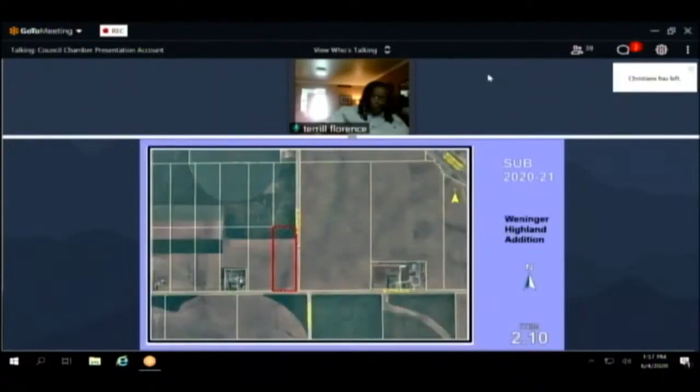Item K of the staff report discussed rights-of-way. The current right-of-way at the corner is supposed to be a 75-foot major intersection. As you can see here, the applicant has only denoted a 30-foot right-of-way dedication, so County Public Works would like to see that increase to the standard of 75 feet. Then it tapers down to 60 feet on the remaining portions of those arterials.

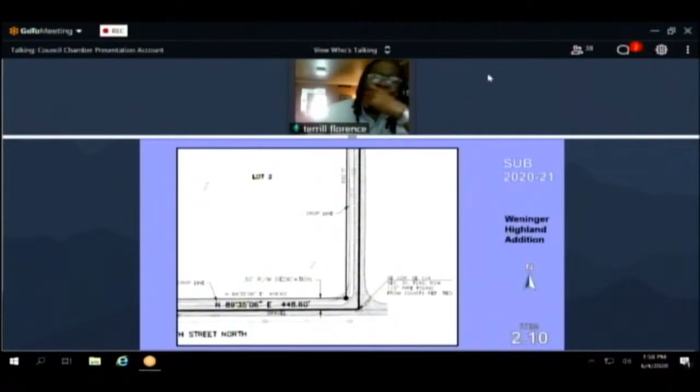Per item L, the Central County Fire Department is requiring their standard compliance with the service drive code. And that concludes staff comments.

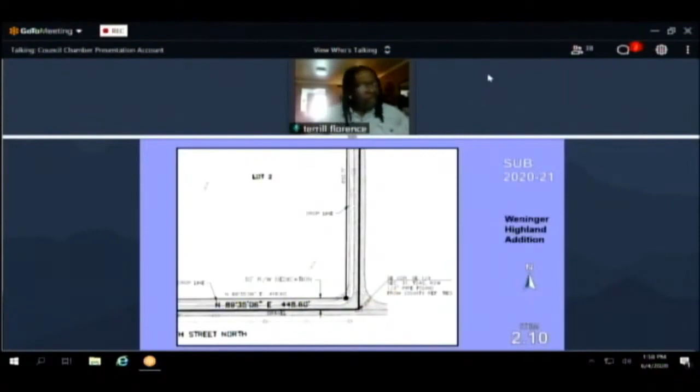Questions for staff? Questions for staff? Okay, no questions from commission here. Anybody at Century 2 wish to speak? Yeah, that's who wanted to hear it.

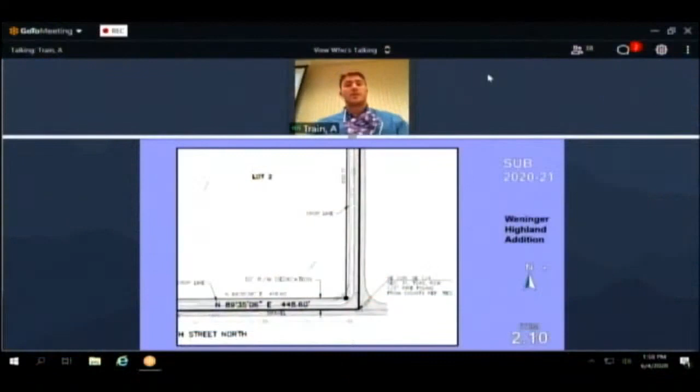Yes, we have the agent here for this item. Levi Bond with Kaw Valley Engineering, 200 North Emporia, Suite 100, agent for the applicant on this case.

We're in agreement with all the staff comments except for K, requesting the additional right-of-way dedication. We ask that the commission approve a dedication of 30 feet, as we have denoted on this plat, as 30 feet of half-street right-of-way. We're specifically making this request because the 30 feet matches the existing section line road.

We lost sound. Okay, try again. You got me now? Yeah, yep, we have you now. All right, sorry about that.

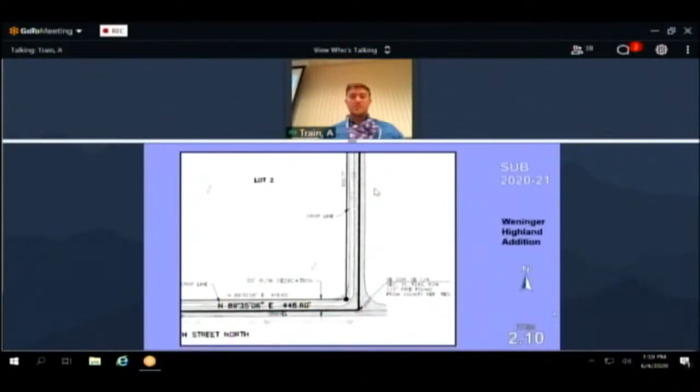So we're specifically making this request for the 30 feet of half-street right-of-way because it matches the current road easement, the section line road easement, as it has been since the estate was established. It'll allow for the continued use and maintenance of this road as it is now.

There's no clear and present need for an additional dedication. There are no plans to expand this road at this time or in the near future, as all of you probably know by just looking at the aerial. It's miles away from any semblance of a town. It's 3 miles from Andale, 3 miles from Colwich, 5 miles from Maize, I think, the closest point of Maize. So it's not near any municipality.

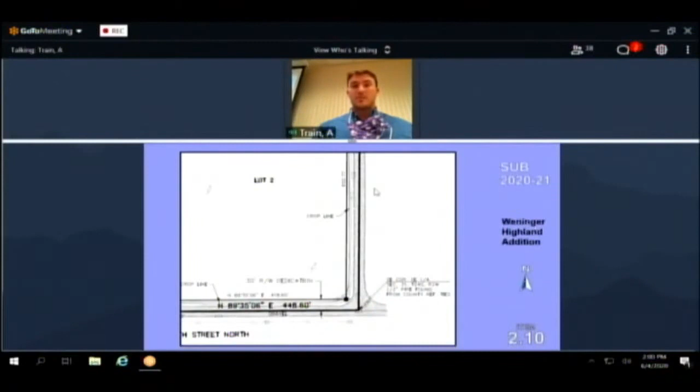If you did require the additional right-of-way, it'd be over 1 acre of additional land that we dedicate, which would have real financial implications for our client, thousands of dollars, in fact. They're negatively impacted by this financially, but there's no benefit received from this dedication, as there are no plans, and the road is already maintained by the township.

Given all that information and the lack of need and the lack of compensation for the dedication, we request that you approve a 30-foot dedication along both 199th and 77th Street. I'd stand for any questions.

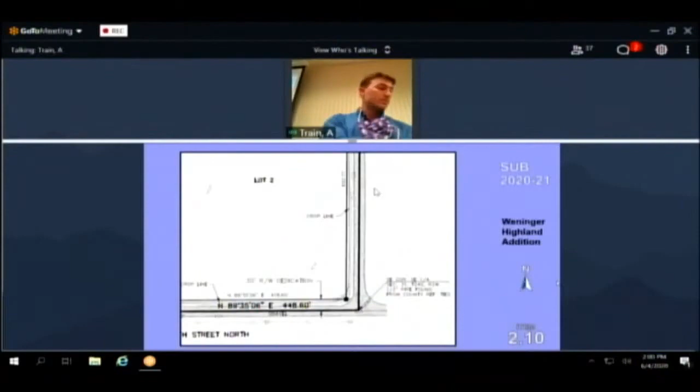Any questions for the agent? Not, thank you. Anybody from the audience, is there anybody else there at Century 2 that would like to speak on this item? No, that's the only comment. Is there anybody from another device wish to speak on this item? You would have 3 minutes. I'm not hearing anybody. I'll bring it back to the commission for discussion.

Lynn Packer from County Public Works, I believe, wants to chime in. Chairman, this is Lynn Packer with County Public Works.

We are still requesting the additional right-of-way. Although we recognize that this is a rural section of the county, as you can see by the presentation that's up on the board right now, the township is very limited in what they can do with the right-of-way. Whenever these opportunities come up, the additional right-of-way allows them to more easily take care of the drainage out there. You can even notice in the corner clip, they can't even really grade around the corner without getting on private property because of the existing conditions.

So the townships appreciate these plats when they come through because they get the additional right-of-way and they can make improvements they weren't able to do before, or without going through agreements with the property owners.

Additionally, by state statute, the county is required to provide a location for utilities in the public right-of-way. As such, our policy denotes that we do not want them in the bottom of the ditch. Therefore, we provide shelves on the backside of the right-of-way for them. In this particular case, that's not possible, and there is no utility easement on the plat. So this would be the location for the utilities in this location if we could have the right-of-way that's been requested.

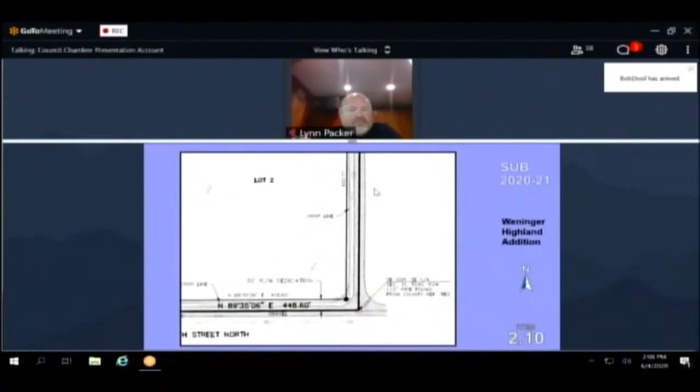Additional questions from Mr. Packer? Mr. Johnson or Mr. Florence, do you have any questions? No. Okay. Are there any other speakers, anybody else who wishes to speak on this item? I'm hearing none. Agent or applicant, if you'd like to come back, you will have 2 minutes for rebuttal.

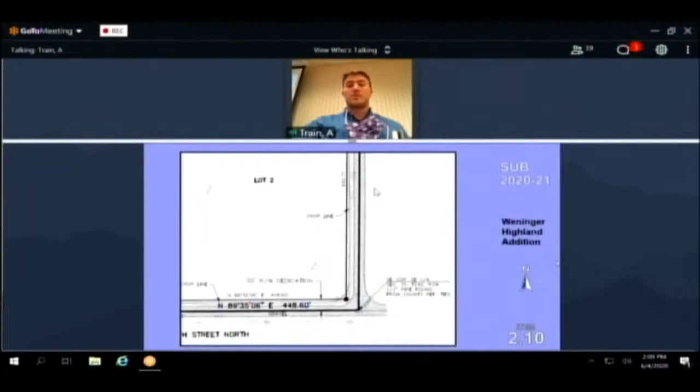Mr. Chairman, I'd make a motion we approve per staff comments, including the right-of-way dedication as proposed by staff. Is there a second to that motion? Second. Is that Mr. Nix? I didn't see it. Hugh, did you make that second? Yes. Okay, motion by Mr. Foster, second by Mr. Nix.

Any additional comments, questions? All those in favor signify by saying aye. Aye. Aye. Those opposed? Aye. Let's do a show of hands on the opposed.

Okay, Mr. Bill Johnson, where do you stand on this one? Opposed. You're opposed? Okay. Yes, so it passes 9 to 2. Okay.

10 to 2. 11 and 2. Chairman, we have a...

Yes, comment from the public that on case number 4.5, I'm sorry, that we voted on consent, someone had been trying to comment and they wanted to hear that. So, okay, if they want to hear it, we will hear it.

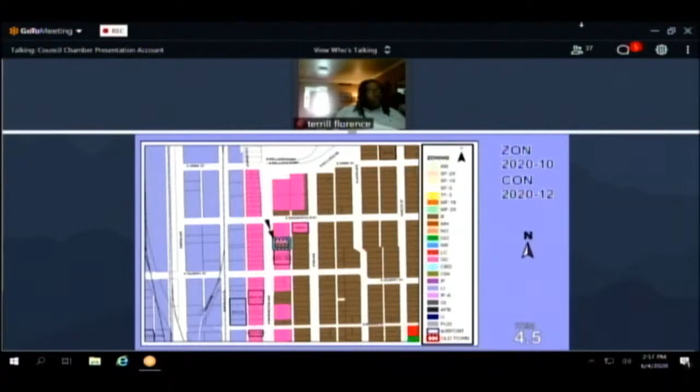According to their webpage, the company strives to keep electronic waste out of landfills, taking products that use electricity or batteries. Individuals or corporations can drop off their items, and individuals or corporations can also come pick up their items for their use as well. No person is allowed on the property except for the employees. All products are unloaded from the drop-off area into the yard by the employees as well.

If you go to the aerial, you can see that there is a fence along Washington, and access to the property actually uses the alleyway. If you're not familiar with the area and you drive down Washington, it's a 6-foot screening fence already. They just have a banner for their sign saying they're there. There's no access to the property there. You really can't even see any of the materials from Washington at all.

All of the access is from 2 gates, one on the north side of the property and one on the south side of the property along the alley. And that's where all the transactions and business take place.

A wreckage and salvage yard means a lot, land, or structure or part thereof used for the collection, dismantling, storage, and salvage of machinery, equipment, appliances, inoperable vehicles, vehicle parts, bulk waste, salvage material, junk, and discarded materials, or the sale of those parts thereof. Typical uses are for motor vehicle salvage yards or junk yards.

There's also some supplementary use regulations that set conditions found in section 3D6E. One says that the operation of this use cannot be abutting an arterial street. Therefore, with this request, the applicant is requesting a waiver of that because Washington is an arterial street. In cases in the past when we've had them abutting arterial streets, there's kind of been a rule set in place that if you're at least 150 feet off of the arterial, you wouldn't be considered abutting. Well, this lot is barely 150 feet or less, so there's no way to be far enough off. They're about 25 or 30 feet off the street, so they're asking a waiver of supplemental use regulation number 1.

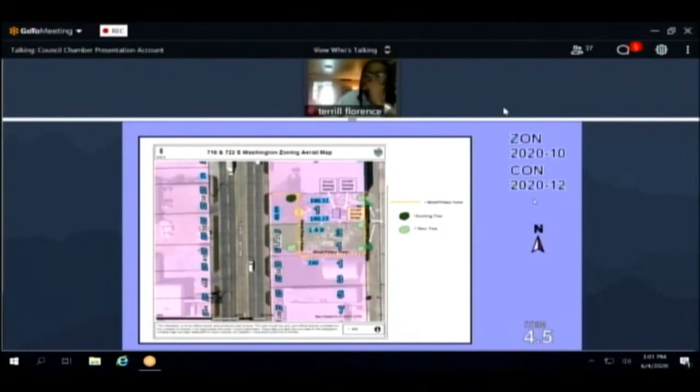The site will also have to come into compliance with the landscape ordinance. Washington is an arterial road, and the ordinance requires that all non-residential uses have a landscape street yard when abutting arterial streets. Based on the dimensions of the subject site, the landscape street yard would consist of 2 shade trees or 4 ornamental trees, or an approved combination of the two.

Therefore, only 1 more shade tree is required to satisfy the landscape requirement. You can see on the site plan that 1 is already present on the west side.

In addition to solid screening, the landscape ordinance also requires a buffer when adjacent to residential zoning. When you go across the alleyway, it's zoned residentially, and so they would be required to have a landscape buffer on the east side, which would consist of a total of 3 trees.

The equation for that is 1 tree for every 40 linear feet. They don't have to be spaced 40 feet apart. The landscape ordinance does allow them to cluster those trees.

Finally, they have to come into compliance with the parking. This would require 2 parking stalls to be placed on site within an approved all-weather surface as set forth by the zoning code.

Property to the north of this, if you go to the zoning map, is general commercial and is a commercial distribution operation. Property to the south is also general commercial, as is across the street on Washington, all general commercial zoning. You can see that further west across the alley from the properties that front Washington on the west side, all of that is limited industrial, so there's a high concentration of limited industrial already in existence on the site.

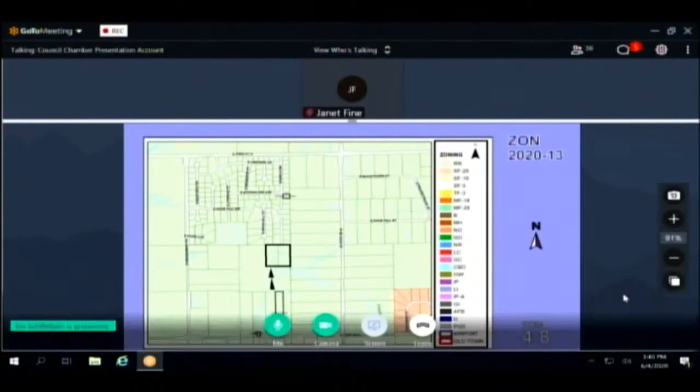It is in the county, but it's within Derby's area of influence, so their planning commission will take care of the platting process. Then when it goes to the Board of County Commissioners, they will consider what the Planning Commission has recommended, and what the Derby Planning Commission recommends. You do have the minutes from that May 21st meeting.

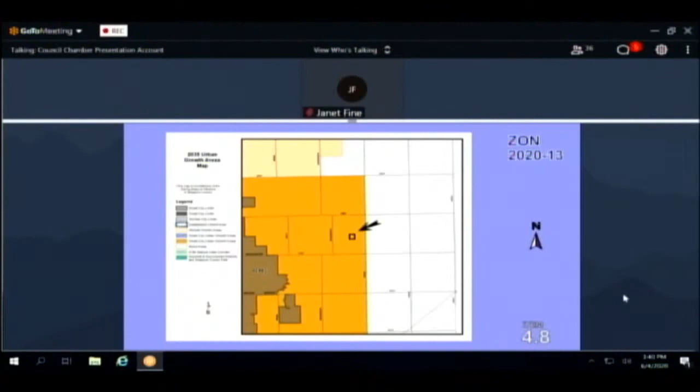This property next, Jim. This property is located south of Fairview Meadows, which is developed into a range of lots from less than 2 acres to, there you go. You can see above the red outline, that's Fairview Meadows, or Fairway Meadows addition in the county. And Eagle Drive opens onto, Jim, can you go to the right side of the red box?

There's an existing house right there, and some outbuildings, and they want to keep that house. This is a Schmeidler family member that lives there, and then they want to develop an additional 6 lots. This is going to be an alternative septic system.

Let's see, what else? The discussion at the Derby Planning Commission was that this was similar in use, and planning department staff agrees with that. That was mentioned in our report, that according to our 2035 future growth concept map, this is an appropriate use or allowance to change the zoning to SF5. It will make it more developable and will be similar in configuration to that Fairway Meadows on the north.

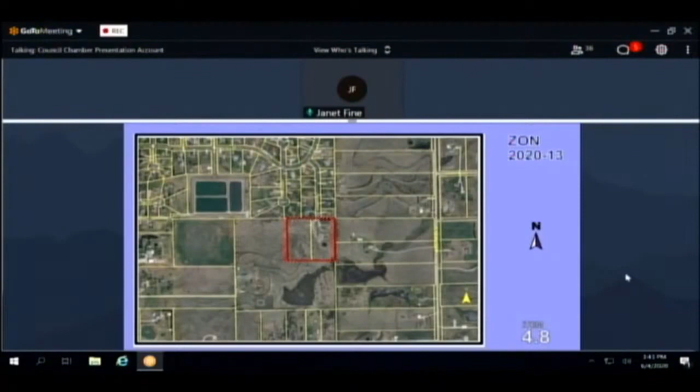Are those half-acre lots, 1 acre lots, the existing ones? Yeah, the existing ones on Eagle Drive. Yes, there's that one on the left, what would be the northwest corner there at the corner at Eagle Drive, where it abuts the acreage, is a little over an acre. So there's a range there between half acre to 3/4 of an acre, yes. And so they're looking at 7 lots in 9 acres, so the size of these lots will be similar to the lot sizes. Yes, they will be under 2 acres, and that's what they had to do; in order to do that, they had to request this zone change.

Additional questions for Kathy? I'm seeing none, so we will go to the agent or applicant. State your name and address for the record, and you have 10 minutes.

Kirk Miller, K.E. Miller Engineering, 117 East Louis. I'm the agent for the applicant.

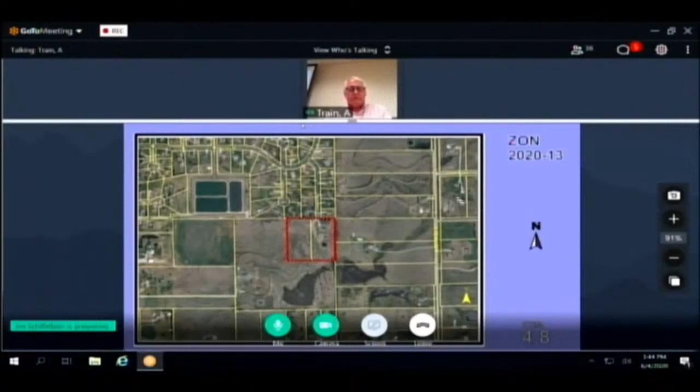This case was heard by the Derby Planning and Zoning Commission, and they approved the zoning case and the preliminary plat. The lots on this subdivision will be greater than an acre because we have to have at least an acre to do alternative sewer. So we only have 7 lots, because the only sewer available is alternative sewer.

The neighbors have some concerns about the roads. These are public roads leading up to it, paved probably about 25 years ago. The owner of this property lived in the Fairway Meadows addition and helped circulate the paving petitions at the time.

He wants to plat this into 7 lots. He's going to initially build a couple of houses for his children, and he's planning on paving the road and using rural water. He's already talked to the Rural Water District, and they have available services for him. He's going to pave the road, use alternative sewer, and have a temporary cul-de-sac at the end, just like the current subdivision is now.

When they platted the original subdivision, they put in a temporary cul-de-sac at the end of Eagle Drive, with the intent of it being extended in the future to serve this property, because that would be the only point of access to this property. Would be glad to answer any questions.

Any questions for Kurt? Mr. Hartman: So Kurt, the development to the north, are those streets private? They're public, they're maintained by the town. Who maintains them now? The township.

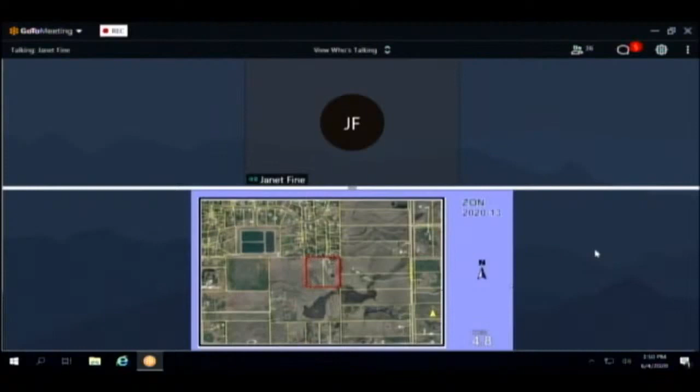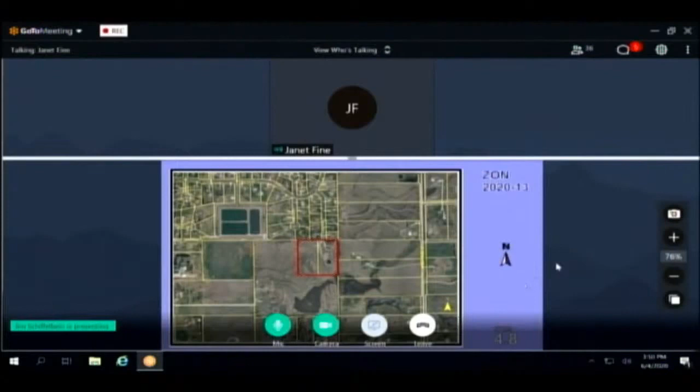I do have questions about the sanitation system and would like any results of that being shared with us, if that's possible. But outside of that, I would request the 1 acre minimum, the single family, and the setbacks at 50 feet, and prevent damage to the road. I'd also like to know about the alternate sanitation system. Thank you very much.

Any questions for the speaker? Mr. Hartman. Why are you requesting a 50-foot setback on these lots?

I had a real estate attorney review this. He said it would be compliant. We basically have 85 feet on our end, and apparently in this case you would measure it from the side of the road rather than the middle of the road. He is here now if you have a question for him, if you want to ask him. That doesn't appear to be the case, so thank you.

Any additional questions for the speaker? I'm sorry, did you want me to? My name is Dylan Fehl. I'm the attorney she referenced. Do you want me to address that question, or was Janet's answer sufficient? I think her answer was sufficient. Okay, thank you.

Mr. Foster: I would like to confirm that the measurement we're talking about is from the property line and not the center of the roadway or something, in the R1B district for Derby. I'm going to have several questions about how much of this falls under our purview and how much is under the Planning Commission for the City of Derby. I think a lot of the questions that came up are good and valid, but I'm not sure they fall under our bailiwick. Any additional questions for the speaker?

Thank you. Is there anybody else out there that would like to speak on this issue? Yes. Okay, state your name and address for the record, and you have 3 minutes. Yes sir, my name is Stephen Bro. I live at 6744 South Eagle Drive, adjacent to the Fines.

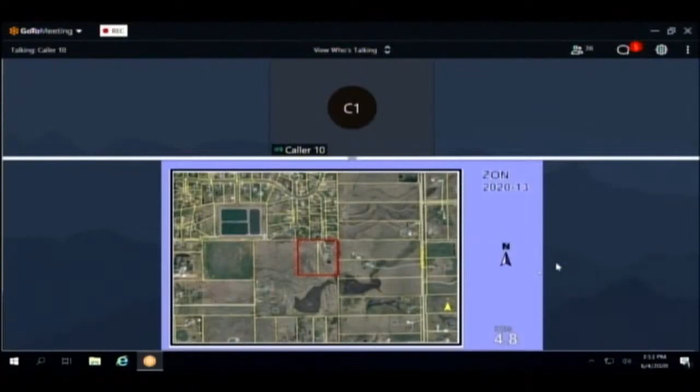My biggest concern is where the temporary cul-de-sac will be intersecting this new roadway and property. There's a pretty heavy wood line right there, which would prevent drivers from being able to see as they're coming down the road. As is, there's a fair amount of traffic coming out of that property, and there are a lot of kids on the road. I'd like to know if something will be done to address that wood line to provide a better line of sight, and possibly post speed limit signs, because if we're going to have more traffic on what has been a cul-de-sac for many years prior to us moving in, I would like some assurance that safety will be considered to prevent unsafe conditions from this up-and-coming traffic and possible future development.

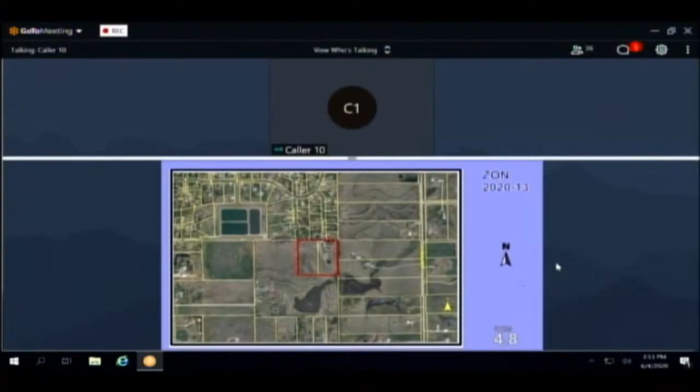Okay, I'll make sure the applicant addresses that, and if not, we've got staff that can address it. Anything else, sir? No questions? Thank you very much, sir. Any questions for the speaker? Seeing none, thank you, sir.

Is there anybody else out there that would like to speak on this issue? State your name and address for the record, and you will have 3 minutes. No sir, are you talking to me, Mrs. Fine? No, I'm talking to somebody else that hasn't spoken. Is there anybody else that would like to speak on this issue? Hearing none, I will bring it back to the agent or applicant, and you, Kurt, will have 2 minutes for rebuttal.

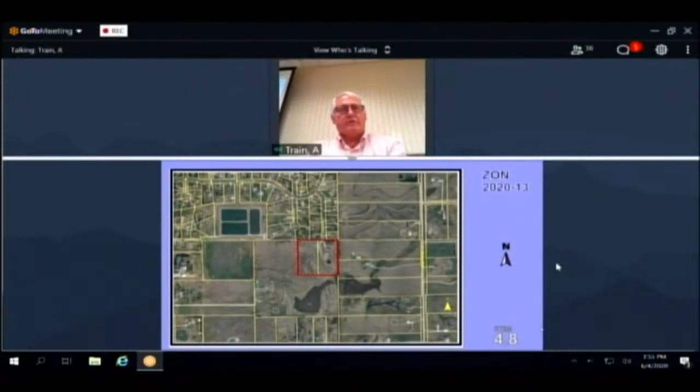Okay, this is a zoning case, and we're trying to get the zoning approved. A lot of those issues would be part of the platting. We still have to go to a final plat with the city of Derby, and it'll go to the county commission. The street will be built per Sedgwick County standards, and their engineering department will review it, so they will make sure we have proper sight distances, proper pavement thicknesses, proper drainage, and that type of thing.

Right now we're just asking for approval. This is just to change the zoning to SF20, which, because we don't have an SF40 like they were requesting in the Derby Planning Commission meeting, have basically an acre lot. But we're stuck with an acre anyway because of the alternative sewer. That acre is bigger than every other lot except for one on Eagle Drive up there, so.

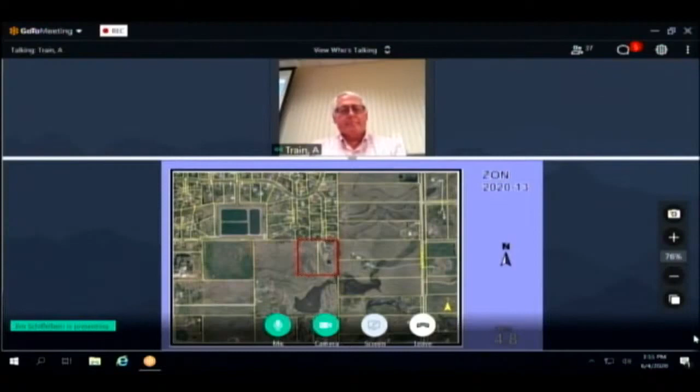Okay, I think we're definitely appropriate for the subdivision. Any additional questions for the agent? Seeing none, thank you, Kirk. Thank you.

Okay, bring it back to the commission. I guess I'll start off. There are a number of things the callers had concerns about in terms of setback lines and those types of things. How much of that is part of the zoning process, and how much is part of the platting process that will fall to the Derby Planning Commission?

The zoning regulations establish a standard setback measured from the property line, not from the middle of the road, but you can measure the middle of the road. But most of the items raised deal with subdivision or platting issues, and those are the jurisdiction of the city of Derby. Okay.

And the issue about lot size, that's controlled by the Sedgwick County Sanitation Code, which requires for less than 2 acres, well actually almost less than 5 acres, if you're going to an on-site system today, you're dealing with the enhanced on-site wastewater systems, which require a 1 acre minimum anyway.

Okay, thank you. Questions for staff? Any suggestions, basically for those that called and had a number of questions - what is the process, where is the plat process?

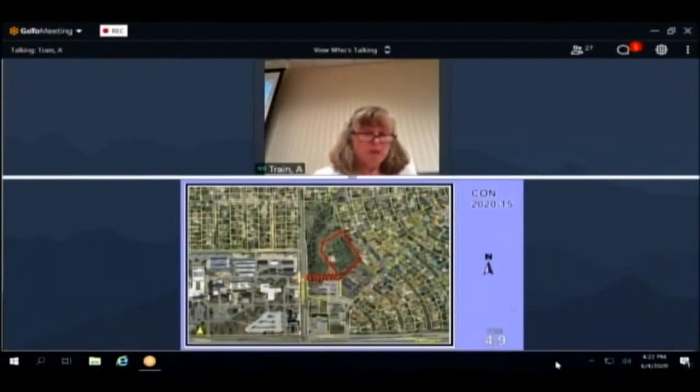I was driving around yesterday evening, and only a mile and a half away is a golf course that has recently been closed. I would think that area needs to be reconsidered for this building. It's still on the east side, still in the area you need for your police station. Taking area out of that golf course, or ex-golf course, would still leave plenty of green space for those neighborhoods, whereas the green space in our neighborhood is basically going to be decimated by this building. I appreciate your time.

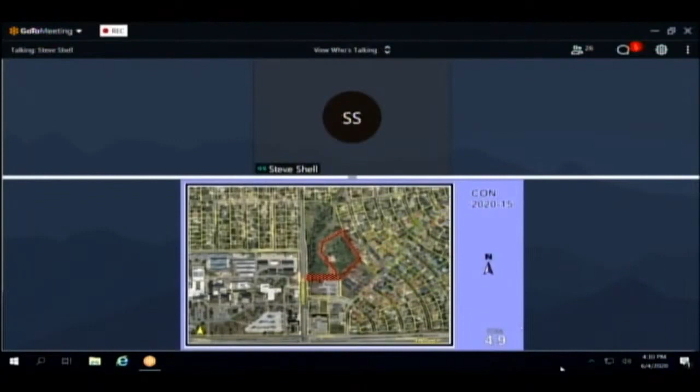I gasp in horror when I saw the extent of that building, I'm shaking in shock. I can dispute almost every statement that Brian made because I already went through these statements with Alan King and Councilman Brandon Johnson. So almost everything from Brian is just a deception away from what's really going on.

This is sort of immaterial and irrelevant. My home is 100 feet from Cypress Park. This morning I walked from one end to the other and back home. The majority of the park is on the east side of that uncrossable stream, which is 8 feet deep and 10 feet across. So that other side is just a piece of pie that happens to be there. The heart of the park is exactly where the red line is.

As a homeowner, we normally just go about our lives and hope that the members on this board care enough to look out for our interests. This is a very unusual situation for me, and a big deal for me and my family. In this case, my family will be directly negatively affected if this application request is approved. And this is forever. Cypress Park was born in 1950. It's now age 70, and this effectively removes the heart of the park.

The Wichita City Plan of 2016 states: 'The Wichita Park System has come a long way since it was established in the 1920s by L.W. Clapp. Clapp's vision incorporated a vital urban community with adequate public parks and open spaces to provide every Wichita citizen with the opportunity to enjoy nature without traveling far from home.' The Wichita Department of Parks and Recreation is supposed to be the steward of this land.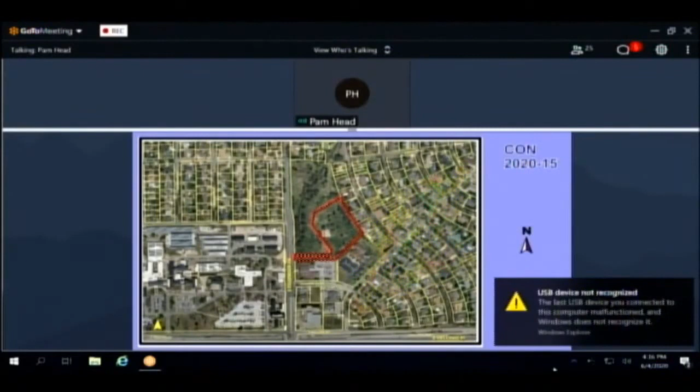And it outweighs the downsizing of the park. I certainly empathize with the neighbors on Brookside, and they are part of our neighborhood as well. Unfortunately, they did not find out until very late that the park would be imposing on their property. But we really feel like there was an opportunity for them to have found out about the park if they would have come into our meetings. And so we still feel like the park will have adequate opportunity for play, for walking, all those things.

But my question for Kristen would have been, I'd like to know who she proposed the parking lot to, because I think it's a great idea for consideration, and it may be a compromise that is worth discussing. Anyway, I just wanted to say that a majority of all of the neighbors attending our public meetings overwhelmingly support the presence of the East Substation.